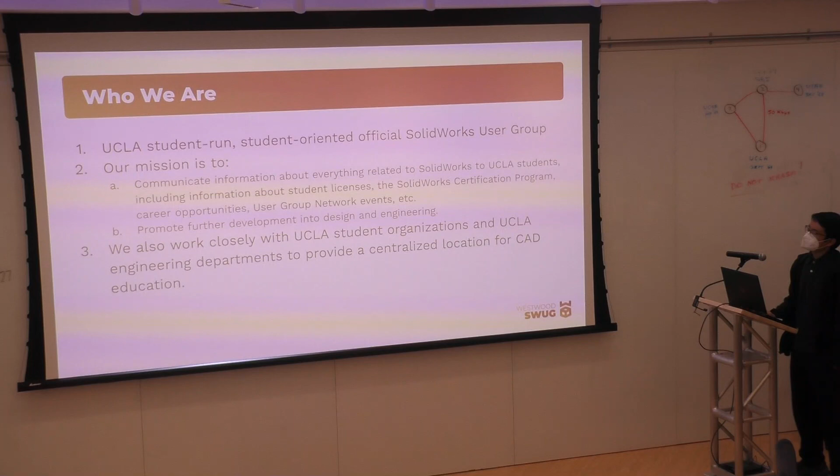Okay. So first, who we are. We're a UCLA student-run, student-oriented, official SOLIDWORKS user group. A user group is one of many user groups across the world that benefit from SOLIDWORKS official branding, but also official resources. As a user group, we're qualified to give out certifications, certification vouchers, official resources for preparing for those certification exams, and also to connect you with official SOLIDWORKS events.

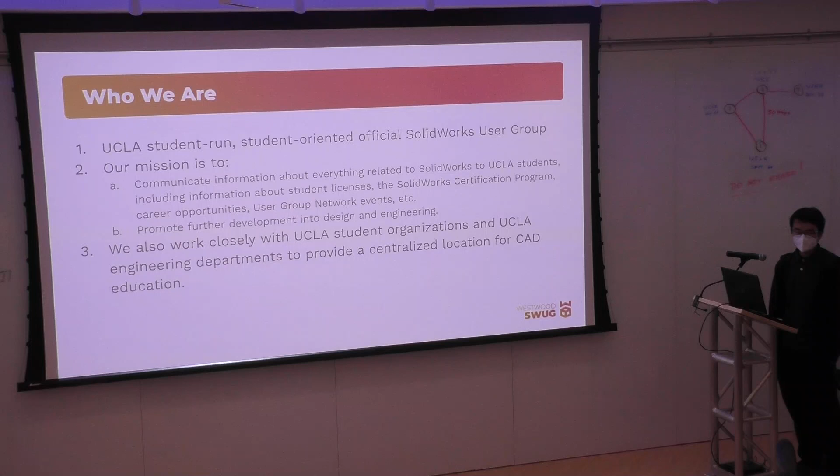To this end, our mission is twofold: firstly to communicate information about everything related to SOLIDWORKS to you, and also to promote further development into design and engineering in general. We also work closely with UCLA student organizations. I believe all of you heard through a UCLA student organization and not directly through us. And also with UCLA engineering departments; we sometimes work with the MAE department for department-wide emails for advertising as well.

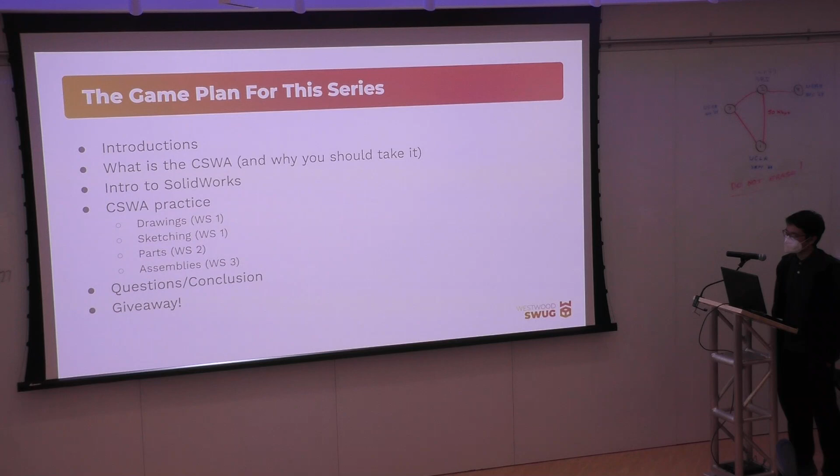So what is the CSWA exam? CSWA stands for Certified SOLIDWORKS Associate. This is the first exam out of 3; actually there are a few more levels, but there's associate, professional, and expert, in increasing order of difficulty. It's a 3-hour exam, and a 70% passing score is needed, so it's a C. It's not too hard. It can be finished in under 2 hours if you have enough experience, so plenty of time for you to finish.

There's no live proctor, so theoretically nothing prevents you from cheating, but don't do that. It is strongly recommended to work on your local machine, because if you lose internet connection and lose all your work, you have to start from 0, and we don't want that to happen.

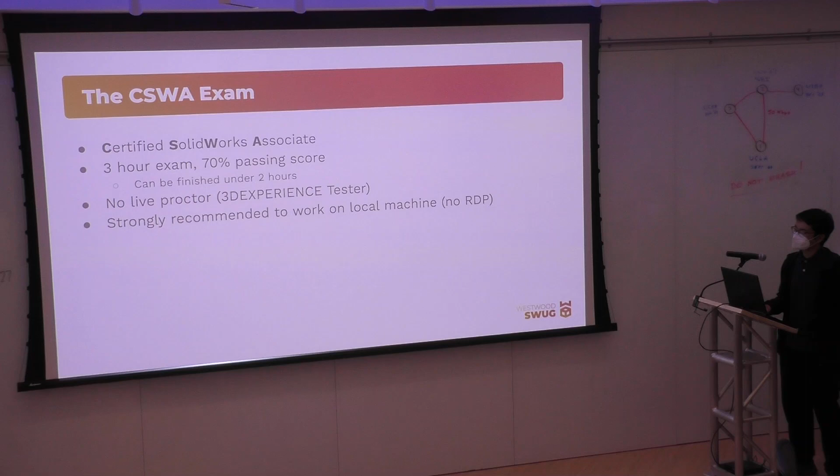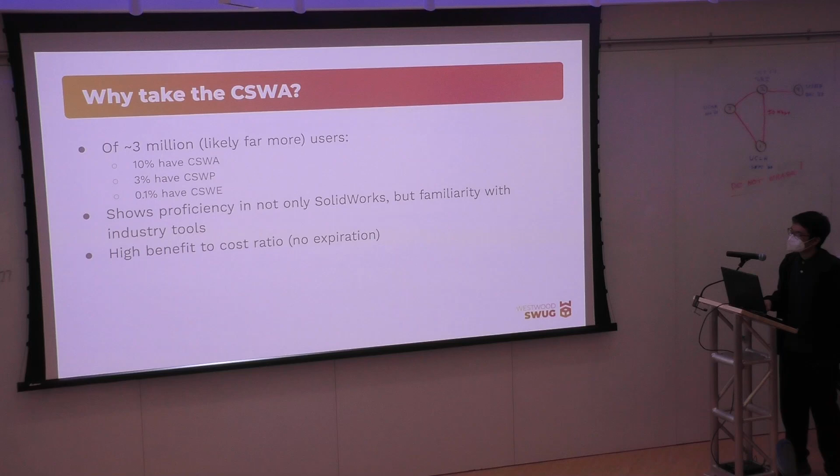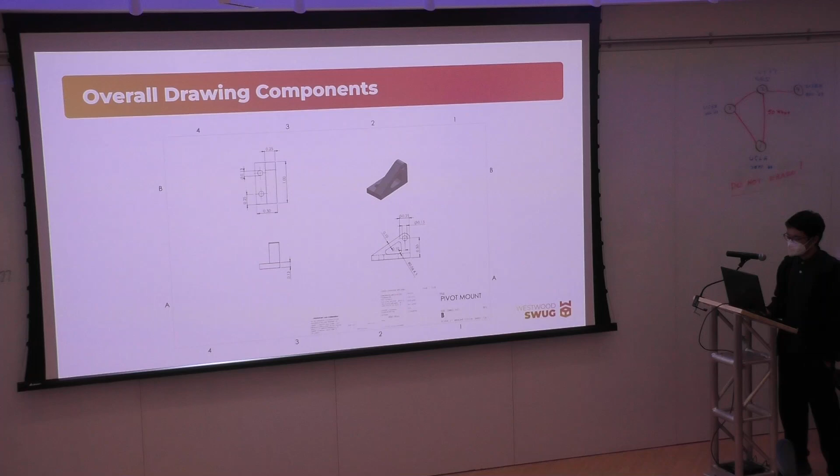Awesome. So now we have a little cheat sheet that has drawing views. And how many of you guys didn't get the email that this is talking about? But for the rest of you, it should look like this. Does everyone have theirs?

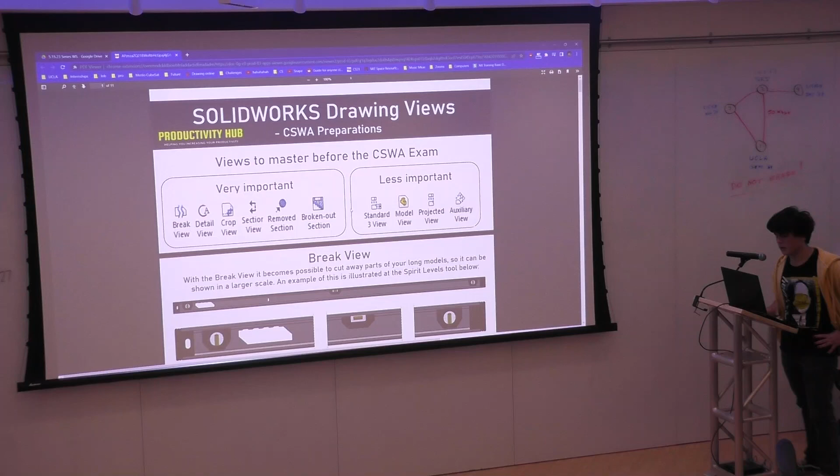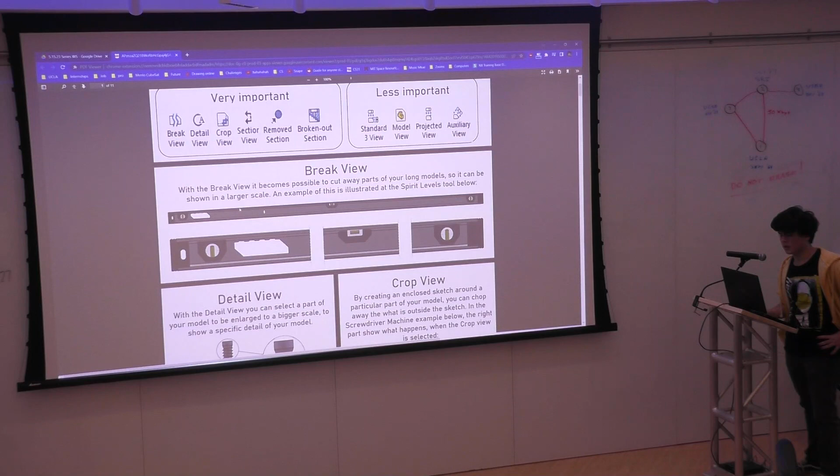Awesome. But this just goes over 6 views that are very likely to be on the exam, and then 4 that may or may not be on the exam, depending on the difficulty of the CSWA. But the first one that you're going to want to definitely know is a break view, which is pretty self-explanatory. It's just a broken section, kind of in the middle, if there's nothing really interesting going on there.

A detail view could just be like a little circle that's magnified. That's also a little self-explanatory. And then the crop view is sort of similar to the detail view. The detail says a specific scale, but the crop view can be anything. They're pretty similar. Oh. Do you have a question?

Oh, the PDF. Oh, wait, how many didn't get it? There were 3? Oh, 4, oh.

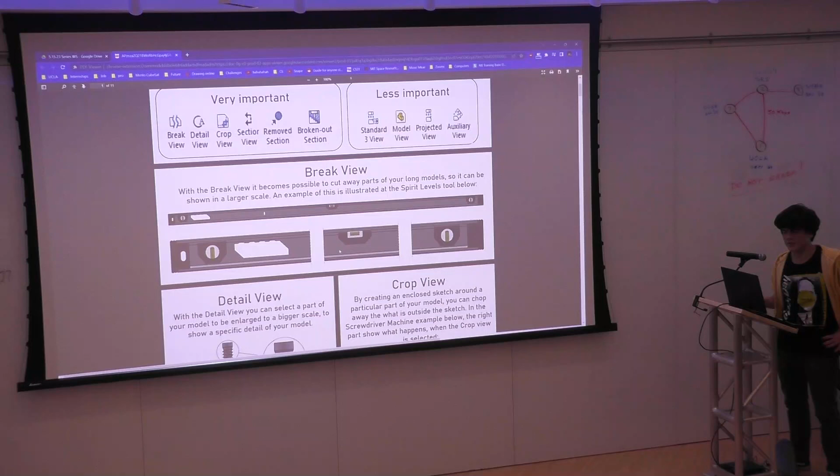Interesting. Does everyone understand these 3 views though, generally? But yeah, you'll have this PDF to reference, and even when you're taking the CSWA, you could reference this document because technically there is nothing to really stop you.

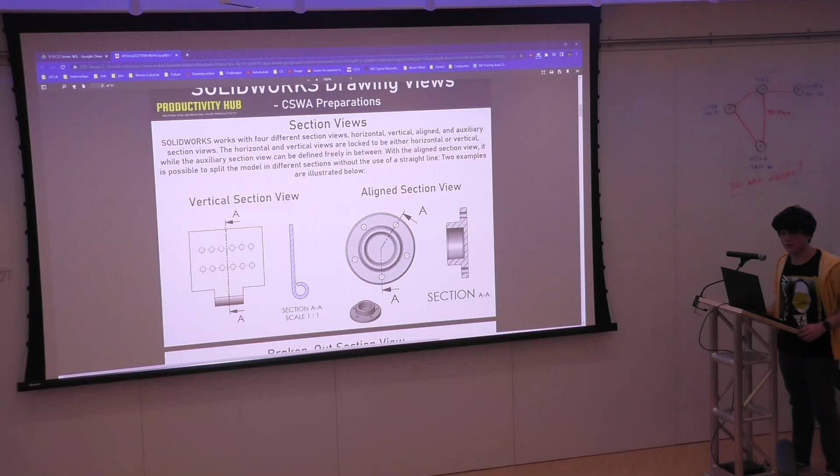And then two also important ones that might be on multiple choice, because basically the way the CSWA is structured is there's going to be 3 sections. The first section is going to be small questions, including what's the name of the view that will give you this image. And then parts 2 and 3 are parts and assemblies, which we're going to touch on the second and third days. But this first day is going to be about the views, to kind of internalize those. Does that make sense, everyone?

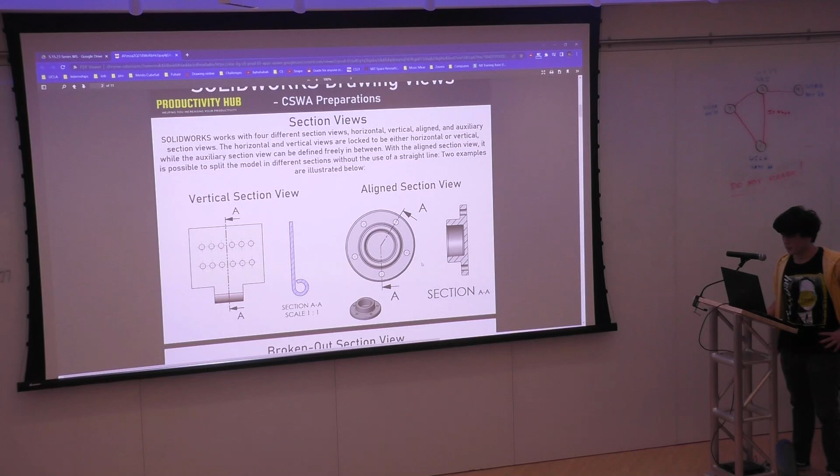But yeah, a section view is when you have 2 letters typically, and it will tell you which section it is. And it's basically, if you take a plane and slice it down the middle, right where that line is, when you look at that plane, that's what's going to give you this little image right here. And then an aligned section view is similar to the section view, it's just not a straight plane, it could be aligned in a different way. Does that make sense to everyone? But both of them will say section AA, or something like JJ, DD.

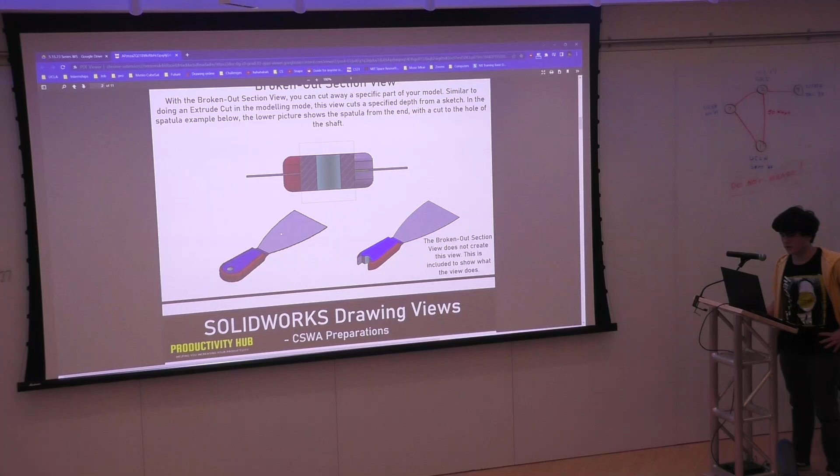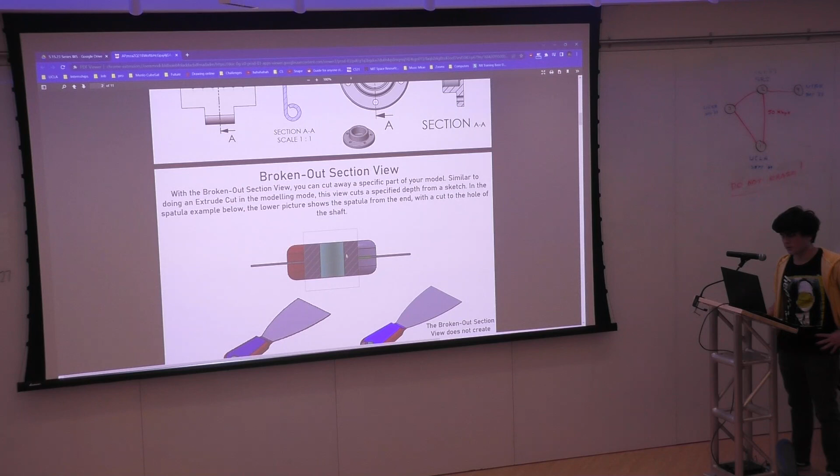And then a broken out section view is when instead of forming the entire plane through the entire object, it's just a little small broken out part of that. And that's just the terminology that I guess we use to do this. Does that make sense, everyone?

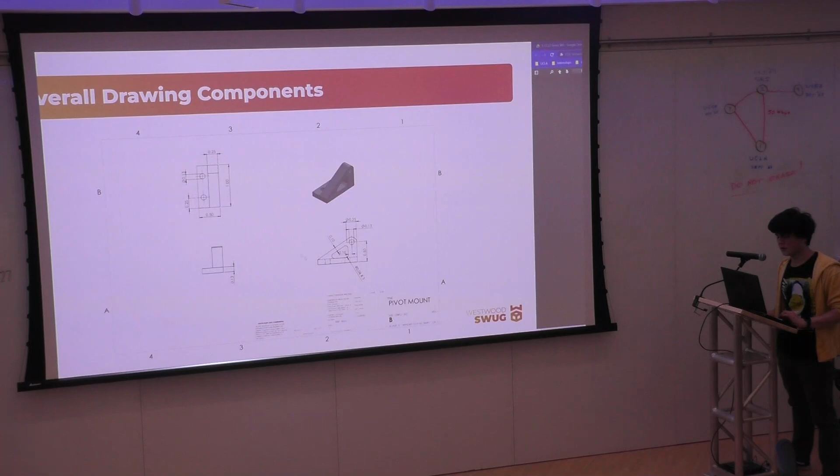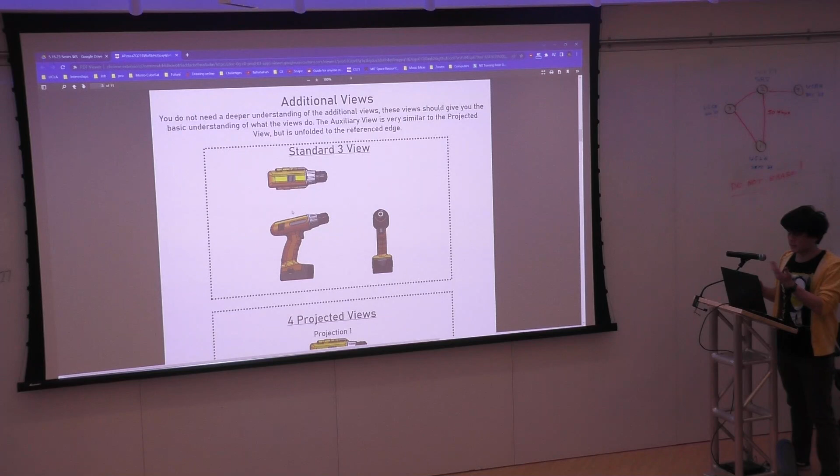Cool. And then here, you don't really need to know this for the CSWA, it won't ask questions on these types of views, but when you see the part on, for example, this drawing, there's 3 projected views. That together is called the standard 3 view. So if maybe your professor asked, hey, can I have a standard 3 view of something, I've never taken the CAD class, so I don't know if he's going to ask that, but that's what we refer to as a standard 3 view. And then 4 projected views is the similar thing, but for top, bottom, left, and right. Cool.

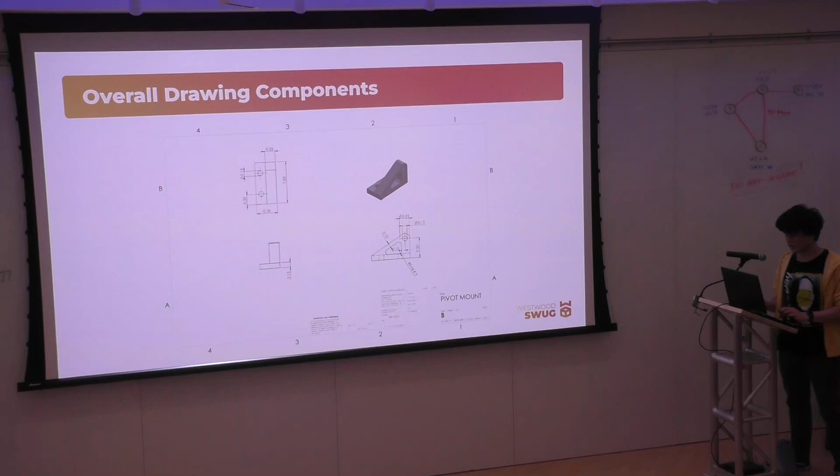Any questions on just the drawing views? And you can take time to internalize this. You have the PDF as well, if you ever need to reference it when you're taking a practice exam or just looking over the questions. Sounds good? Cool. So, for example, here's an example question. Would anyone like to volunteer to answer this? Feel free to reference your PDF as well.

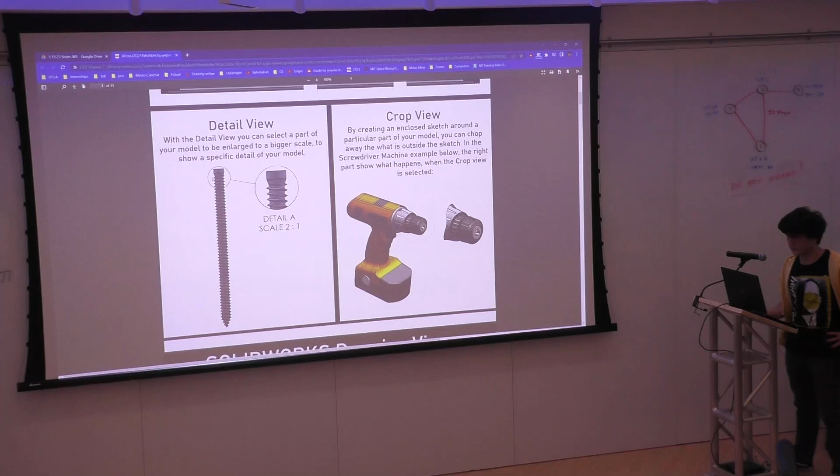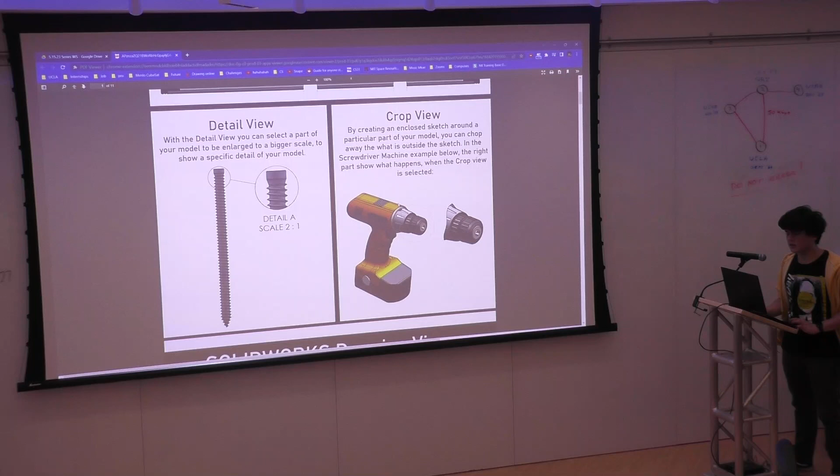Yes, crop view, because the way you make a crop view, let's go back to this document for a second. I'm pretty sure a detail view is always a circle, but a crop view, the way you make it is you actually create a separate feature, a sketch, and then make a little line, and whatever's inside that line is what you can view in that crop view. And so the way you can distinguish these two is if it's not a straight box or a circle, then it'll just be a crop view.

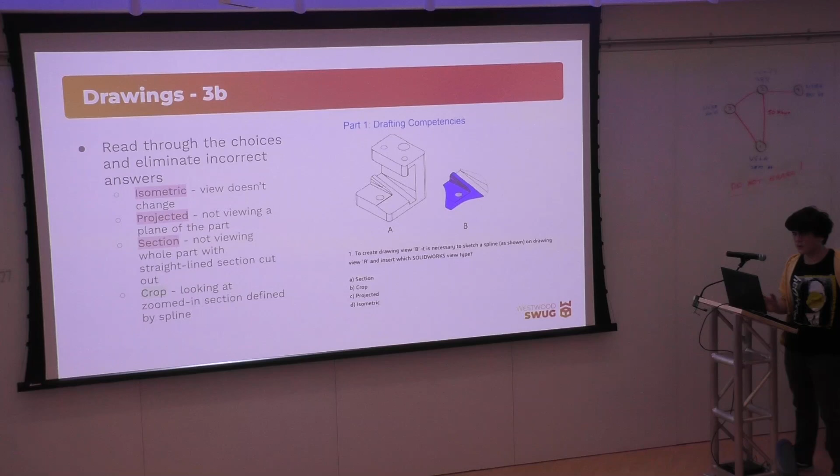So you can also do this by process of elimination, because the isometric view was when you could view all 3 sides, and B is not an isometric view because you can't see the entire part. And then a projected view is you're not viewing it straight on. And then for the section view, there wasn't a dashed line that said AA or something like that. So that's how you rule out the section view. Section views are pretty easy to identify because they say section AA or something. A is an isometric view, yes.

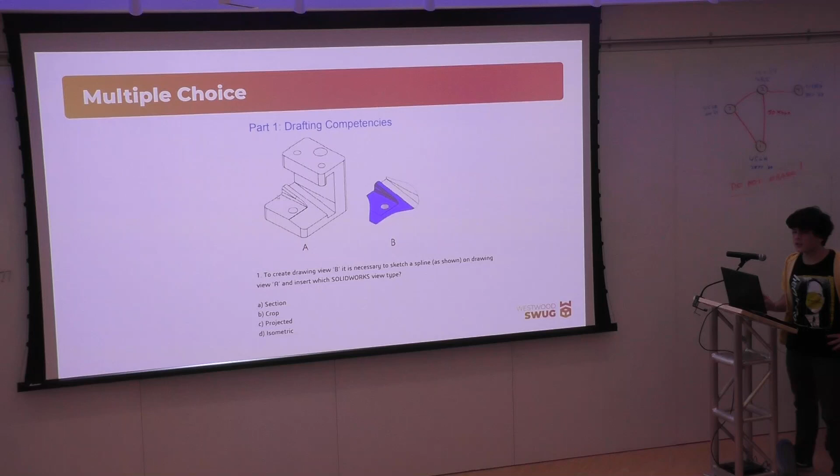And then what about this one? Okay, so right up here, it actually shows there's a little bit of a spline sketch that kind of outlines the same thing here, but it's just a dashed line.

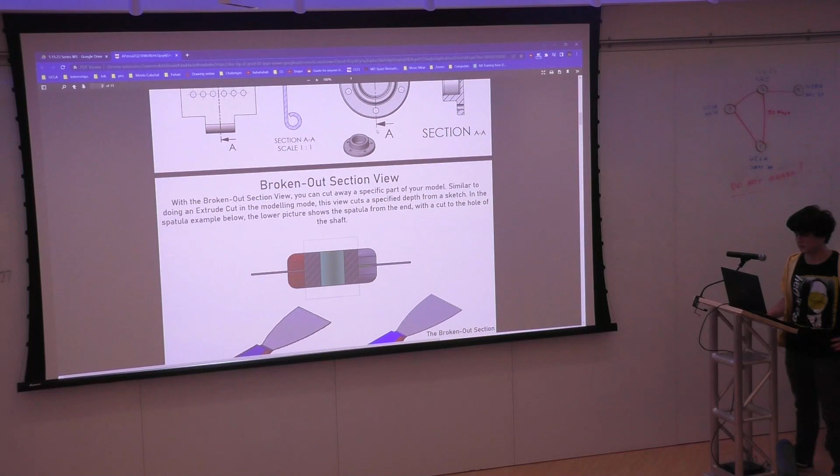Close, because it does take a small section out of the object, but it's a specific one. Here, to go back to the document a little bit. It's one of these 3. So here's the slides again. So yeah, which creates this view from this?

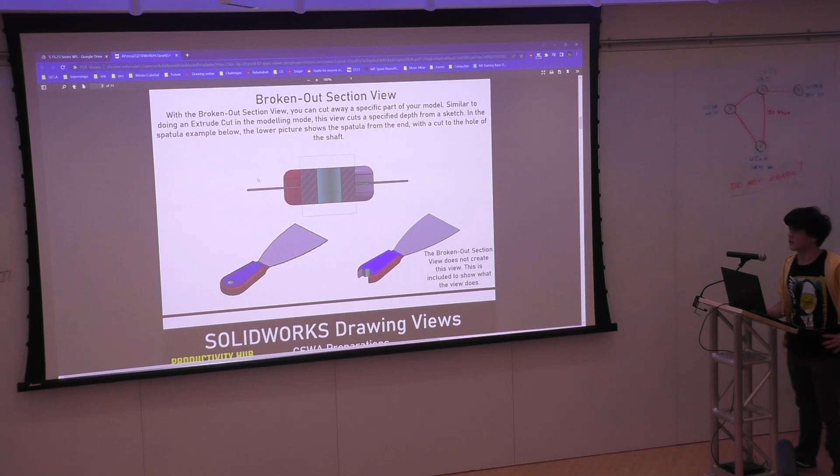Yes, correct. I don't know if we have an answer slide for this, but it is the broken out section, because as you can see, this is a very helpful graphic Suraj found, and it's basically like if you just take a part of it and break it out, so that when you look at it, it's like you're looking kind of at an X-ray view, and that's what it looks like here. So, that was technically another little show.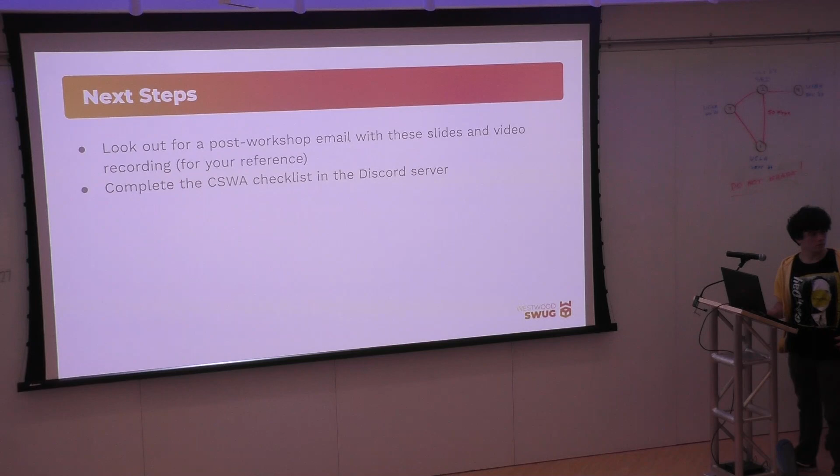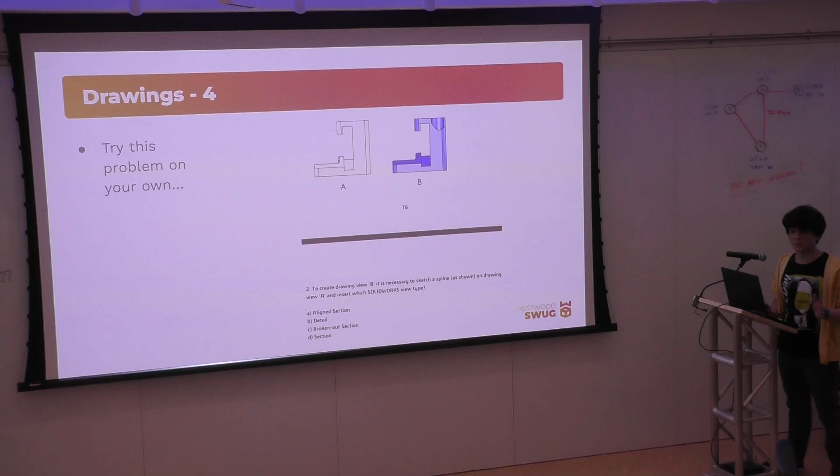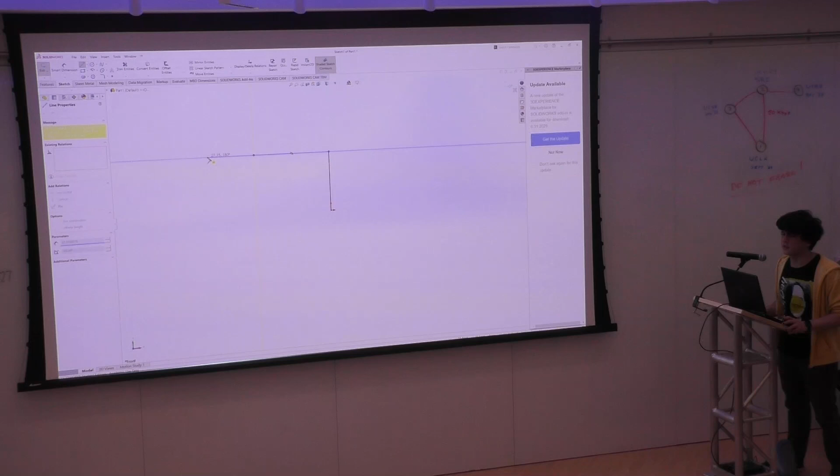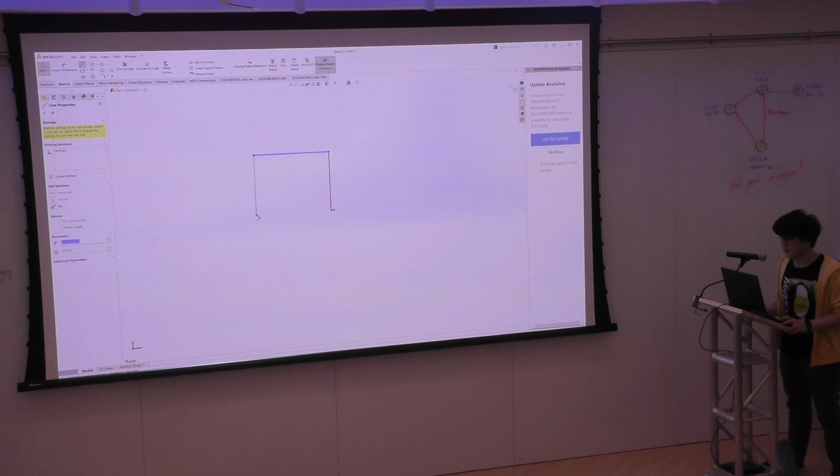And one thing that SolidWorks will do is it will sort of snap it to whatever it thinks you might want to do. So for example, this right here is a vertical line. This will snap to horizontal, and it will give a little blue thing like, yay, I'm helping you out. And it will also interpret other things, such as this being horizontally aligned to the origin. But you will need to do other things in order to make sure that it doesn't move, because I can still move it. Everyone following along so far?

Ooh, I did the cardinal sin of not setting my units before I sketched. So eventually you need to set your units. If you go down to the bottom right, you can't really see it on here, but it's going to say custom. And depending on what the part says, you're going to want to go IPS, so inch, pound, seconds, imperial, or MMGS, millimeter, gram, seconds. These are going to be the two that were on the CSWA. I'm just going to click millimeters because we're not savages.

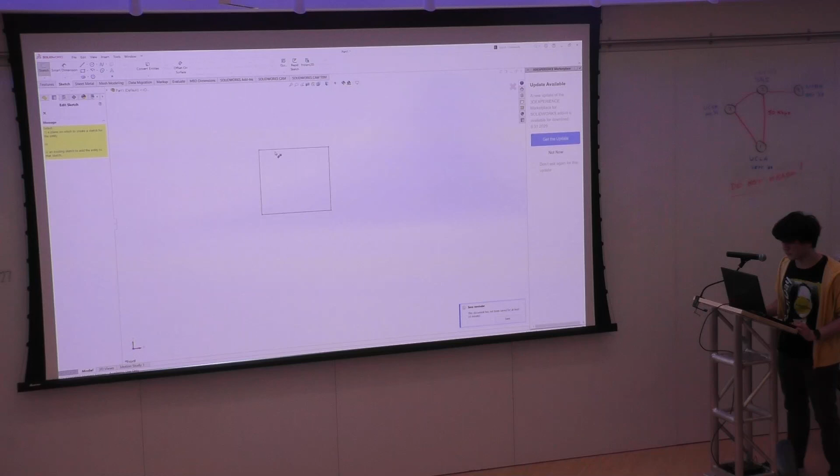So basically, the way that CAD software creates your part is, in order to actually make your part, your part that's unique, and not this rectangle versus this rectangle, you're going to need to specify how long it is and specify the dimensions. That's what's called defining our sketches.

So, for example, I'm going to make this line 50 millimeters long. And now I can't move this because it's fully defined, because right at the bottom right here, I started this entire thing at the origin. So it's locked to where the origin is 0, 0, 0. And this is 50 millimeters to the left, and it won't be able to change. Any questions?

Nice. And if you have a mouse, you can also hold down the right click, and it's going to give you kind of a wheel, and you can go up and down in order to access these things. And then I'm just going to dimension this to like 40 or so.

And now at the very bottom right here, it's kind of hard to see. I wish the projector was a little bit better. But it should say fully defined, and all of your lines or curves or whatever you're making on your sketch should be black. Does that make sense to everyone? Anyone having trouble getting it to say fully defined down here?

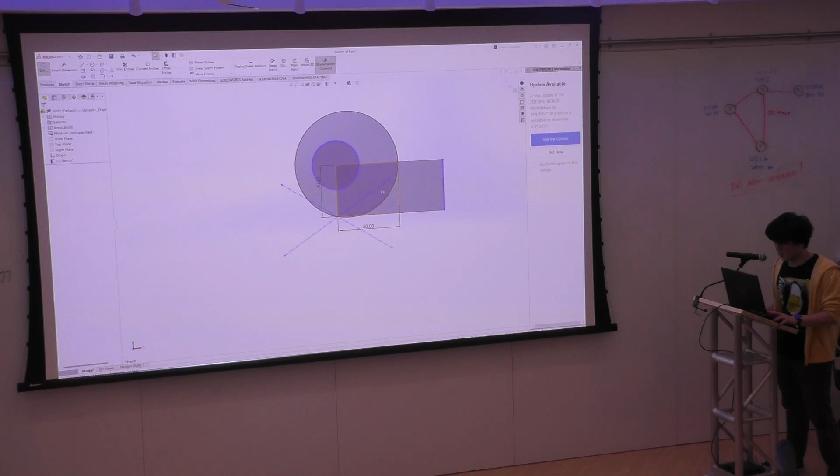So one thing that I have not gone over yet is in the lines specifically, there are these things called center lines, which are also called construction lines or construction geometry. Here, let me make an example. This is me jumping ahead a little bit, but I'm going to create a construction line shaped like right here. All 3 of these are going to be construction.

And what you're going to see is that there's no solid color in here because it's construction. It's only for constructing the sketch. You can't actually do anything with it. So I'm jumping ahead, but if I was to make this into a 3D object, I can select the circle, I can select the rectangle, but I can't select the construction geometry.

So when you actually go to make a 3D, SolidWorks is not going to register the construction geometry as anything, because it's just a useful tool to have when you're trying to make sketches. Any questions so far?

Awesome. Is the pacing good? Should I go a little faster, a little slower? Yeah. Like which of the circles, or?

No, because the solid lines, the solid black or blue lines, are all just normal geometry. And then this dashed line right here, you can see when I hover over it, it's dashed. Oh yeah, you can see a lot better here. And then right here, let me align it better, there. These are construction geometry. And if I constrain it, it might be,

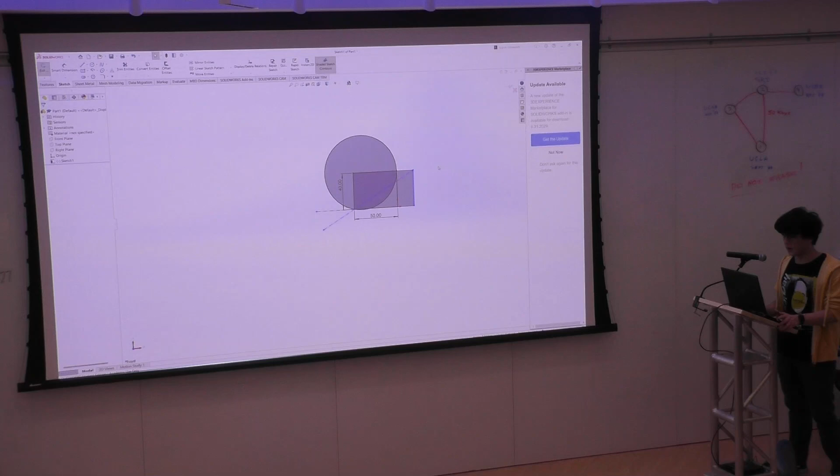So defining just means that there are 0 degrees of freedom. So for example, this, because it's a 2D sketch, it has 2 degrees of freedom. It's already constrained only to be along this line right here. Because if you click this point and hover over it, I think I accidentally disabled my relation showing, which is unfortunate.

But if you try to drag this around, for example, it will drag around. That's because 1 degree of freedom is constrained by this line, but the other degree of freedom isn't. So if it's showing up blue, that's because you can still move it. Anything that's blue, you can drag around and see which degree of freedom you need to constrain.

So the way I'm going to do this is, because it needs to be along here, I'm going to quickly make this 35 or something. And now it has to be 35 millimeters away from this, and I can't move it anymore. Does that make sense? How do I get that to show the eye on the top? What are the dimensions? Wait. Here? Ah, okay. Thank you.

I didn't know that. But anyways, for example, this one right here is showing that this circle is tangent to this. This is showing that it's horizontal, which is just a straight line to the left and right. These are vertical ones. This is coincident, so this vertex that sits right here is coincident to the origin, meaning it sits directly on top of it. Yeah, any questions?

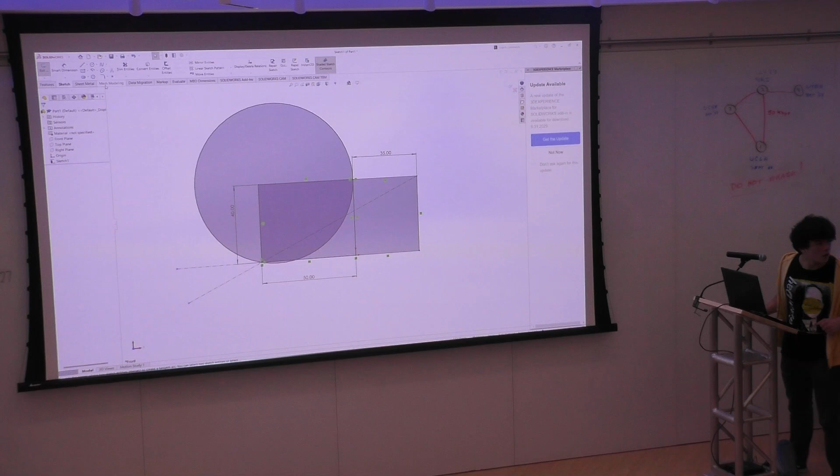Do you want to do some of these? Yeah. So just really quickly, I think we kind of skipped over this, but that's fine. So if we exit out of Sketch, and say you want to view a different angle of your part, middle mouse, and then drag. And so this little, almost full revolution arrow thing appears, and you can rotate.

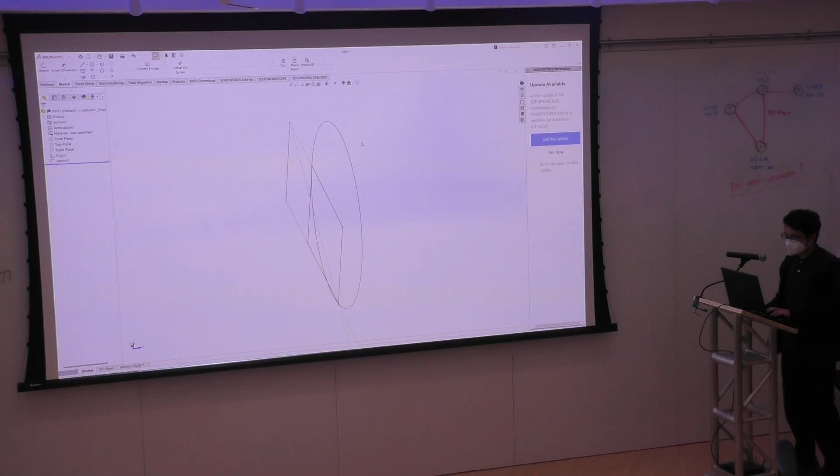And then say you rotate to some random thing and you want it back in its somewhat viewable state, then you press the space bar. Once you press the space bar, everything zooms out, and you get this little dialogue right here. It says orientation. On here you have a bunch of different buttons: top, left, right, front. But usually you'll just click on isometric, which brings it right back to isometric.

So again, space bar, and this little box, that's isometric. It's usually a lot faster to just do Control 7, so that's a shortcut. So say I perturb it, Control 7 brings it back. Say also that you had zoomed in way too far into your part or zoomed way too far out, then you just press F and it brings everything back into a nice, centered view.

So again, that's F. And one last thing, if you want to pan, pan means just moving your view left and right with no change in orientation. You do Control, middle mouse, and you can just move everything. This is useful if you want to zoom into something that's not aligned with the origin or the center of your part. So say I want to zoom into this little dot right here. I just zoom into it. Okay. And F again to restore.

In terms of general UI components, on the left you have what is called the feature manager. This contains all of your features. Colin created one sketch before, so you can see it's named sketch 1 here. A part comes predefined with certain features already: the front plane, the top plane, the right plane, and the origin. The origin is just the intersection of these 3 planes. And at the very bottom of all these features is what's called your rollback bar.

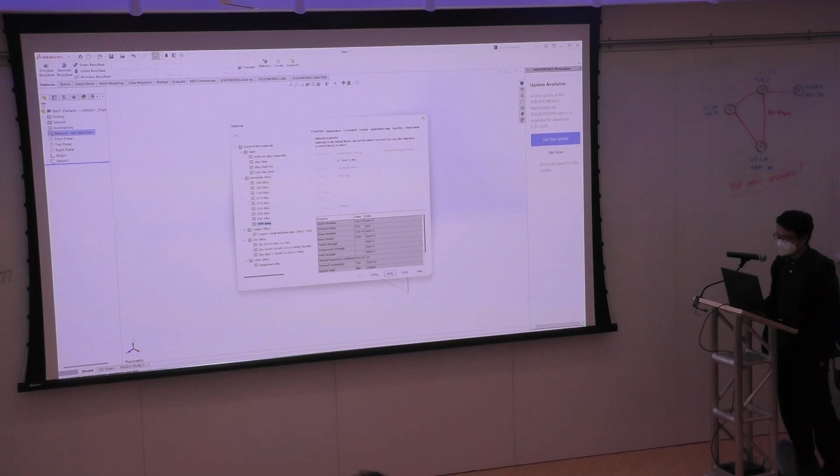So it says 2,700 kilograms per cubic meter. So you can just check if it's the correct material or not. And then you just click apply, and you close. So right now, on the left, it says 7079 alloy. So this is the global material for the part, and this is good practice to define along with your unit system before you start doing anything else.

Anybody have any questions before we move on to actually making a part? Still have 20 minutes. Good time. No question? Okay, sick. Awesome.

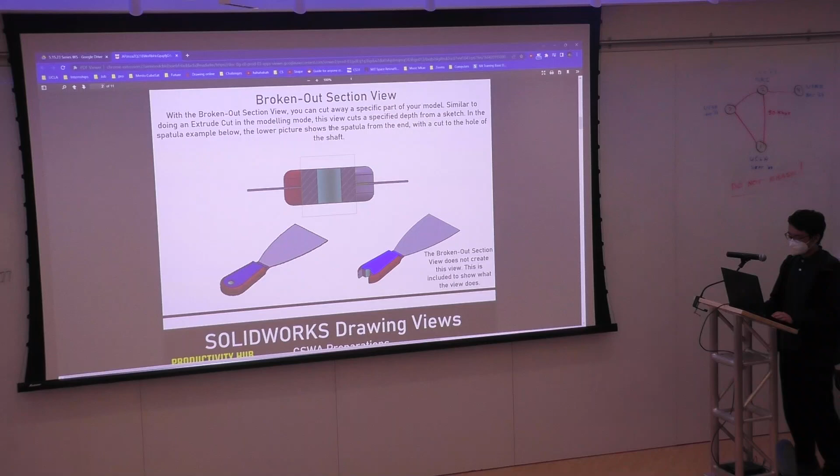Okay. So let's go ahead and open up the PDF again. And this time we scroll down. This is our first part we're going to be doing today. Oh, sorry. Colin's scroll is reversed. Sorry. Okay, no problem. So this is the first drawing that we're going to be doing today.

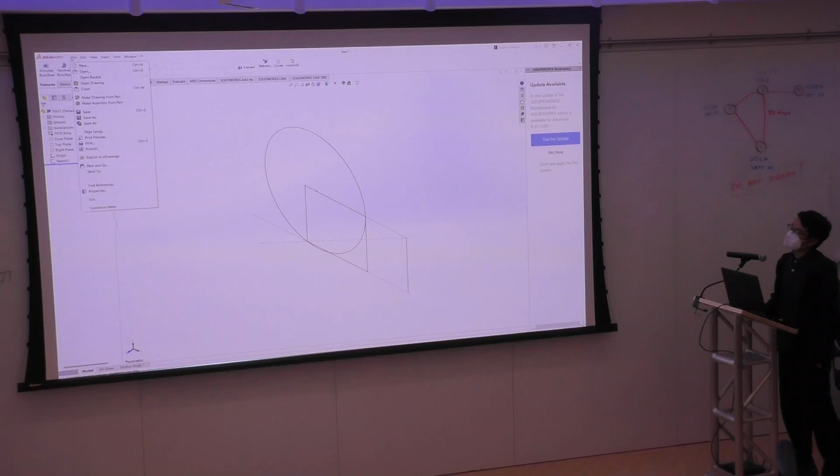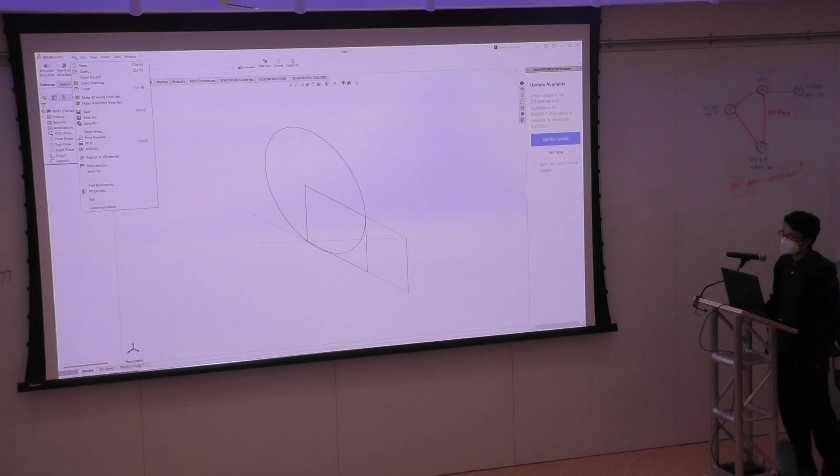So before we do anything, we can go back to SOLIDWORKS and create a new part. So that's right up here in the top left, there's this little arrow. It's usually hidden behind this arrow. If it's not hidden, then good for you, because I spent so long trying to look for this menu. You just need to hover over that little right-hand arrow until you get File, New, and then you can create a new part. Click OK, then it creates a new part. And on the left, you have all your normal features, your front plane, your different planes, your origin.

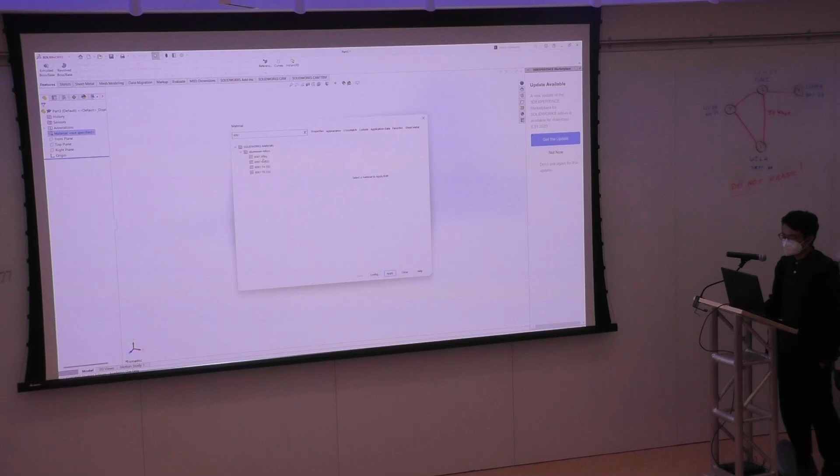So we want to first define our unit system. So on the bottom right-hand corner, we don't want custom, we want IPS. So we click IPS, and then we define our material. So we want 6061 alloy, which is not in the favorites list. So you right-click, edit material, you search for 6061, and you get 6061 alloy. And then we click apply, and then click close. So this is the initial setup done. Very fast, but very important to do.

Does everybody have material and the unit system set up? Does anybody not have this set up?

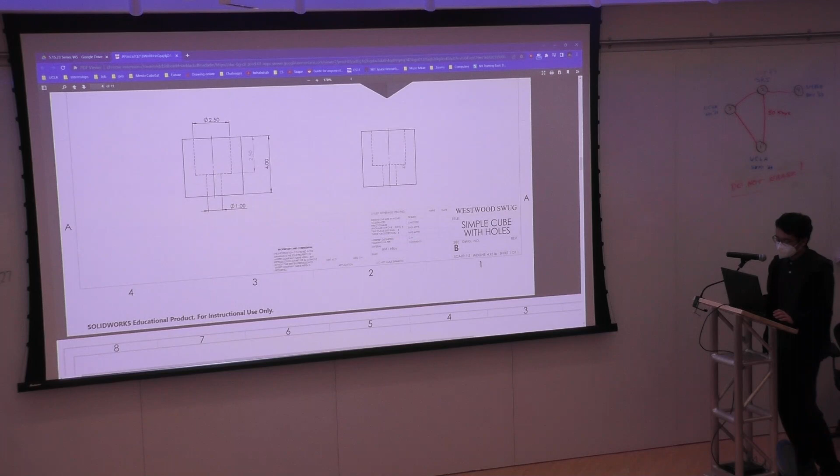Okay, I'm going to assume that's okay. We're fine.

Okay. So next, what we want to do is actually look at the views themselves. So as I said before, we have our isometric view on the top right, and from what it looks like, it's a pretty simple part, right? It's literally a cube that has two holes cut into it of different sizes, and both not entirely through the entire cube, right? And we know it's a cube because if you look at the top view, you can see 4 inches length, 4 inches width, and then 4 inches for the height on the front view.

So the reason why this height dimension isn't in the top view is, of course, because this edge in the front view just looks like a dot or a single vertex in the top view. So we need to have another view in order to show that dimension. So we know it's a cube, and we also know that it has 2 holes, because if you look at the front view here, you can see the hidden lines again, because these are dotted lines that show whatever is inside the part.

And we see that we have a diameter of 2.5 inches, and this is drilled down, I guess you could say, a depth of 2.5 inches, and then underneath it we have another hole of 1 inch diameter. And you can see that both of these are centered, so they're not offset across the center of the cube because it has the center line going down.

So sorry, I didn't cover this before, but a center line can be distinguished in a drawing when it has a long, short, long. Whereas a hidden line, you'll only see dot, dot, dot, dot, dot. So there won't be any variation in the length of the lines for hidden lines, but you will see long, short, long. And once you see a long, short, long, that means that it's symmetric about that line. So I know that these holes are centered in the middle of the cube because there's a center line there. Any questions?

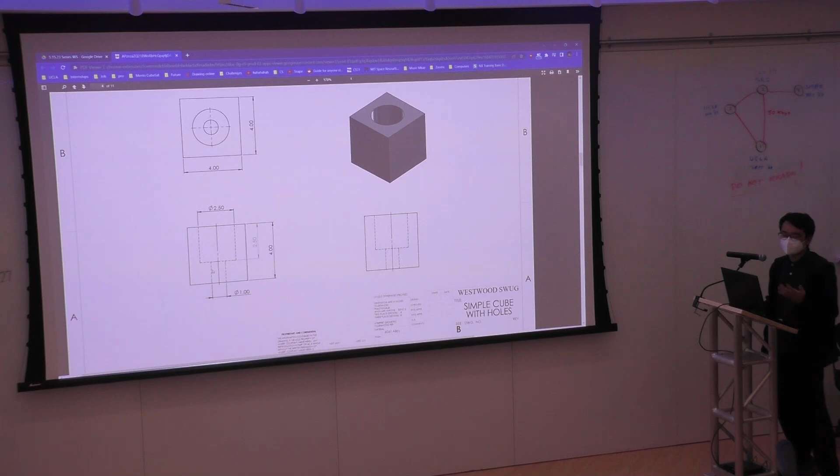No? Okay, good. So can anyone tell me what they would think is the correct order? I mean, there's a lot of correct orders, but what's the way that you would go about modeling this part? What's the order of, I guess, sketches, features that you would create? Okay, nice, nice. What would you do after that? Mm-hmm. Okay, nice. Did everyone catch what he said? Yeah? Okay, good. Yes, that's actually how I would make it.

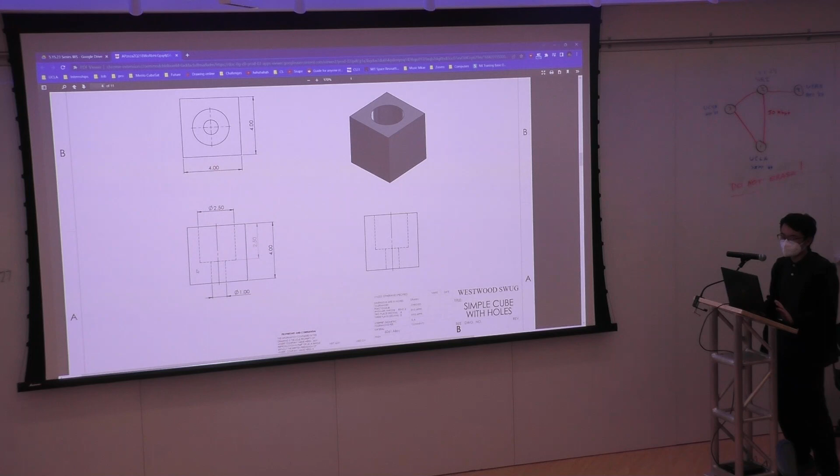But for the purposes of this workshop, we're going to put all the sketches into one sketch. We're going to combine them all into one sketch and then extrude from that one sketch. In the actual CSWA, this is not necessarily encouraged because if you combine all your sketches into one big fat sketch and then you make a mistake, then you might have a lot of work to go through. But since we're just covering sketches today and covering features in tomorrow's workshop, we're just going to put it all into one sketch. So let's go ahead and actually create that big sketch.

So can anyone tell me actually which plane we should make that sketch on? If we were to make only just one sketch, or combine all sketches into one sketch, which plane would we put it on? Not necessarily, because if you put it on the front plane, right, you can only extrude it forward and back of the front plane, then you wouldn't be able to create a circle, right? Top, yeah, top is correct, because on the top plane you can see all of the relevant features in a 2D form. So that means that you can create all of the features from the top plane.

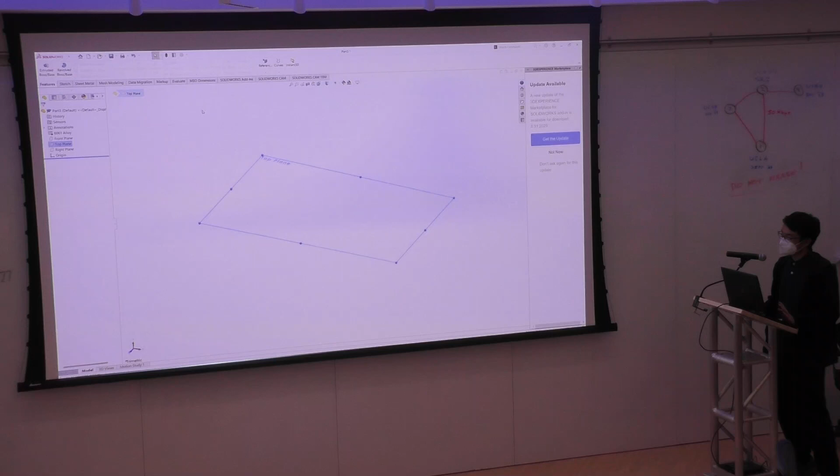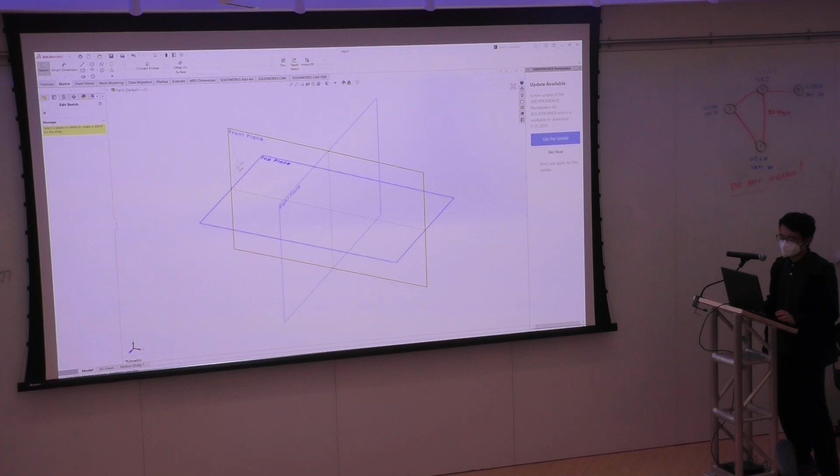So let's go ahead and go back to SolidWorks, and on the top plane, we want to make a sketch, right? So there's two ways of creating a sketch from a plane. You can either right-click on it, and then right here, there's this little sketch button, or as Colin did, you can also click on sketch, and then click on the top plane. Either way is fine, same end result.

If it happens that you do not get a properly oriented sketch view, so for example, if it's slightly offset like this, or some random orientation, what you can do is right-click on this sketch, and then click on this little normal to, and it'll automatically reorient it normal to your view. So this is important because if you make a circle and it looks like an oval when it's supposed to look like a circle, then you know that you need to make a normal to.

So once you have this, then the very first feature that we can make, we can start from the inside and go outside. So we can start with this little circle first in the middle. We know that this has a diameter of 1 inch because if you look down on the front view, you can see it has a diameter of 1 inch, right? So we can use a center circle. Again, that's right here in the top left. You hover over it, it says circle, and you click on circle.

You first select the center, and then you select the circumference. So that's 2 clicks. And once you create 2 clicks, you can press escape to deselect. Then you get a blue circle. And so remember, Colin said blue means underdefined or not fully defined. That's reflected down here, it says underdefined. It's also reflected in the left on the feature manager, where you see this little minus in parentheses. That also means underdefined. Once it's fully defined, you won't have a minus anymore.

So in order to fully define it, we need to add a dimension. So we click on Smart Dimension, and we click on the circumference of the circle, and then we give it a value of 1. Press Enter, and then right now it says diameter of 1. That's pretty simple. Everybody good with the circle?

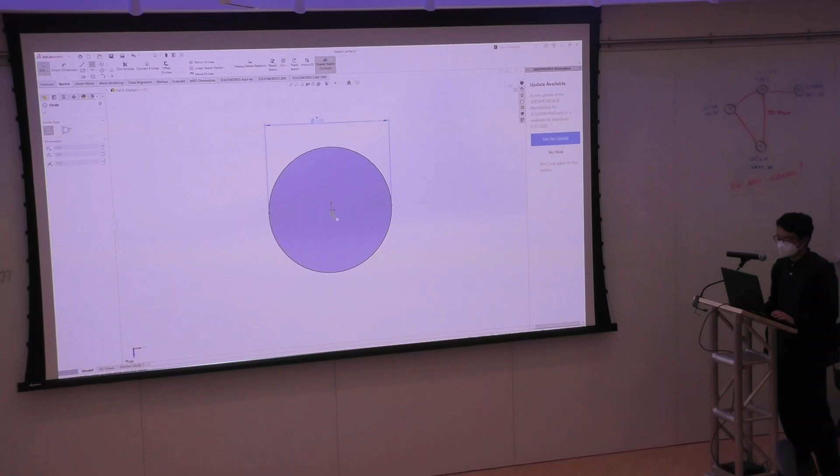Okay, nice. So next is the next biggest circle. Again, repeat the same process, 2.5. So you select the center, you select out. We know it's bigger, so you put it out. We do Smart Dimension, 2.5. Press enter, everything's black again, fully defined.

And the last one we want to do is just make the square, right? So we know it's width of 4, length of 4. So we can use the center rectangle for this. Click on center rectangle, click the center, go out, and then we need to add 2 dimensions, one for the length and one for the width. So we add 1 for the width, 4, add 1 for the length, 4, and now everything is black, and we have fully defined.

So this is actually the end of the sketching procedure for this part. It's a pretty simple part. Does anybody have any questions before we actually move on to the next part? Yeah. Okay, I'll give like 30 seconds before we move on to the next one.

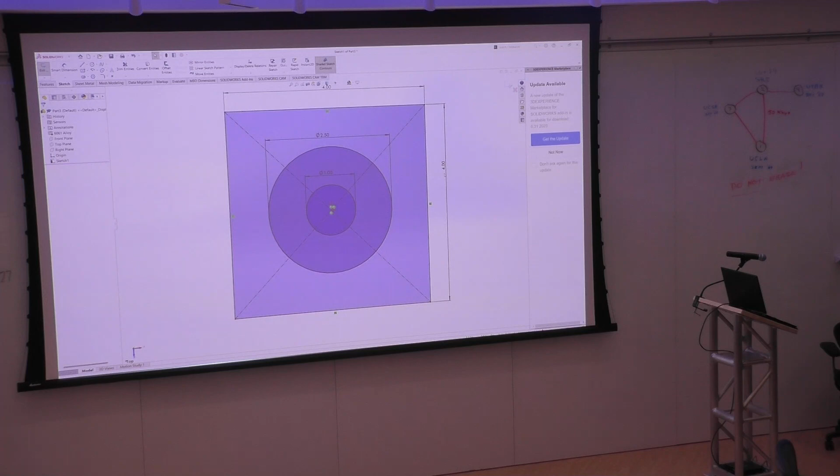Let's move on to our next part. This one's slightly more complicated, but I'm sure you guys can get through it. So we'll just go ahead and scroll on to the next drawing. So this is the latch. This, as you can see, looks slightly different than the cube drawing, because in the top right, our isometric view is no longer shaded. So it kind of just looks white, no color. But again, it's still isometric view.

Nathan, who is another workshop leader, actually said units IPS here, which is nice, removes ambiguity. But you could have also inferred that by the weight down here, which is 0.059 pounds. So here we're actually missing a couple of views, right? Can anyone tell me which of the standard views we're missing? Top? Yes, that's correct. We're missing the top view. We can see the front view here, we can see the right view here, but there's no top view.

And there might be a couple of reasons for why you want to omit a view. One, in this case, maybe you just ran out of room, so you didn't include the top view. Maybe the top view doesn't have any relevant dimensions, so you just remove it for brevity. But either way, we should be able to completely model this without the top view. And so again, this is a single sketch part. In this case, we do want to make the sketch on the right plane because we see in the right view the most features or the most complicated sketch.

So we'll go ahead and create a new part, file, new, part. Right click on right plane, sketch. So we have a sketch on the right plane.

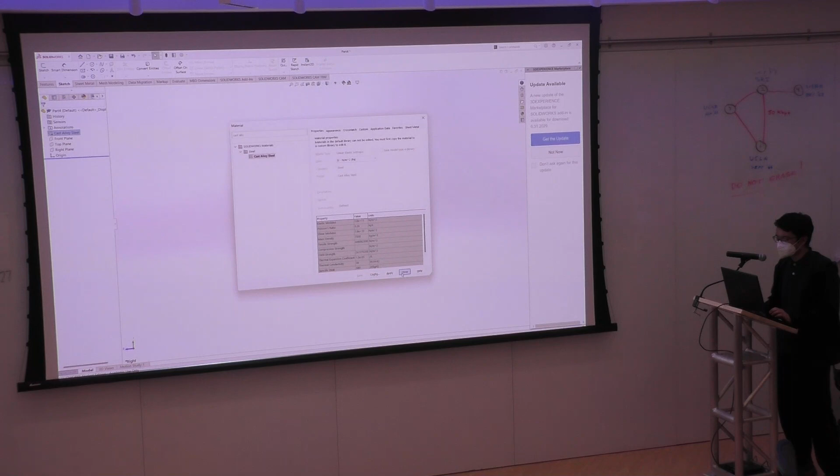So if I wanted to make this circle first, we know it has a diameter of 0.25. Oh, sorry. I forgot to specify my material. Material is cast alloy steel. I also need to change my unit system to IPS. Okay, sorry about that. Okay, right plane again.

We want to create our first circle centered on the origin with the diameter 0.25. So you just dimension it 0.25, enter. And so that takes care of this circle right here.

Next, what we want to do is actually create this bigger circle that you might not be able to immediately see. But if you imagine that this circle was not cut off, and its full circumference was here, then there will be a circle here with a radius of 0.375. So we'll go ahead and create that. And we can infer it's concentric, because it kind of looks that way. There's no actual visual cues for that, but we can just infer that it is concentric.

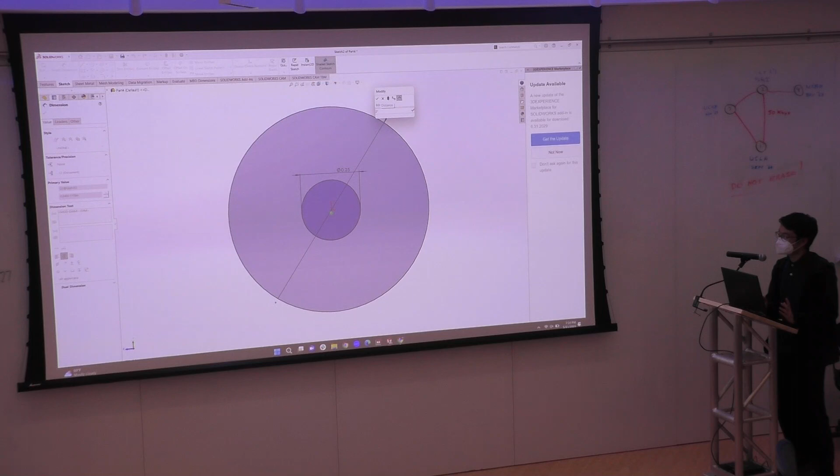So we'll go ahead, go back. And this time, because the dimension defaults to diameter, we can actually do a little bit of math within that window itself. SOLIDWORKS is pretty smart. Diameter is 2 times the radius, so we can just say 2 times, times is an asterisk, 0.375. And so we press enter, SOLIDWORKS automatically resolves that to a number, and then it gives us the diameter.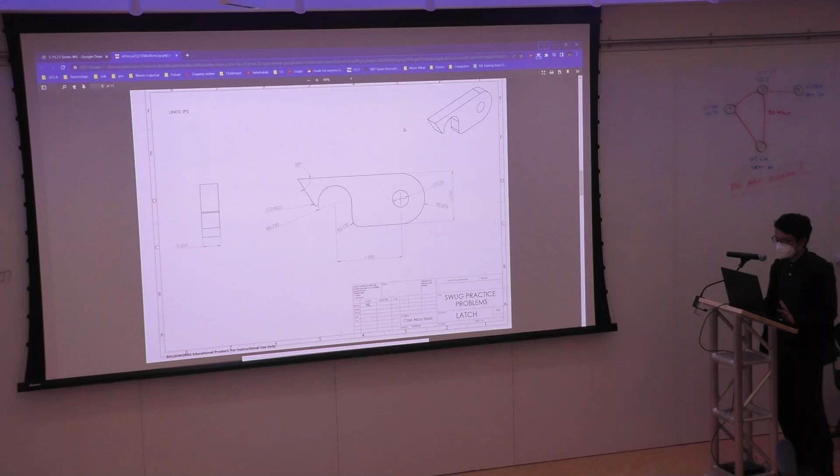Alternatively, you can just create a dimension, change it to radius, and then put in the value of the radius, but either way is fine. So now we have these 2 circles. Next, what we want to do is create these 2 lines that go out from the circumference of this bigger circle. So this is actually quite simple.

We'll just go ahead and select line. You can kind of hover over, and it'll give this little orange diamond that indicates the point that's vertical to the circle's center. So if you click on this, go horizontal out to the side. That's 1 line. And then we'll do the bottom line. So now we have our 2 lines.

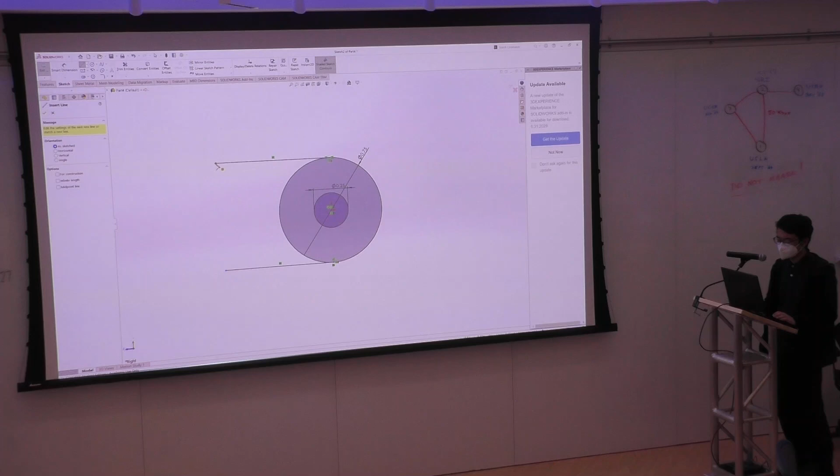Now, the interesting thing is we don't necessarily know how long these lines are, but other dimensions will solve this dimensioning for us. So let's go ahead and create the other stuff. So we have this little line here that goes off to the side, down to the right. Actually, we ran out of space, so we can just drag everything to the left a little.

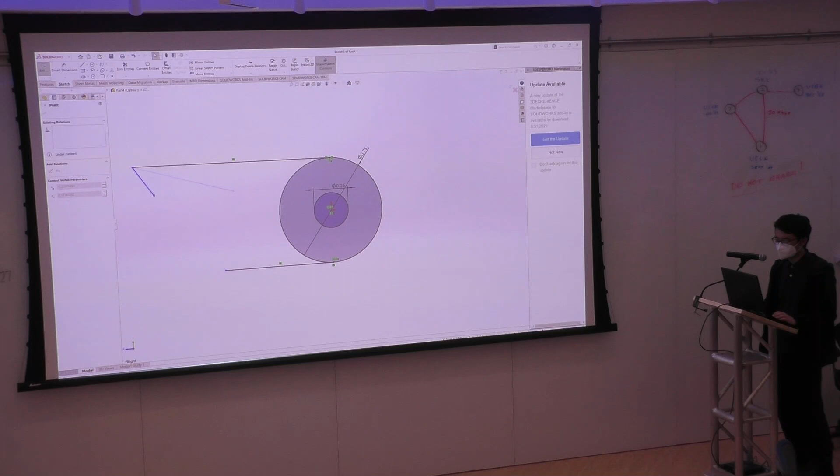Wait, Colin, how am I on time? 7:56. Okay, 4 minutes. Okay.

Then next, what we want to do is create this small little circle here. And for this one, we can be a little creative. We can use an arc instead of a circle, because we know that we're not going to use a full circle anyway. The arcs are right underneath the circle. And we can use a center point arc, because we want to make the center of this arc horizontally related to the origin, right?

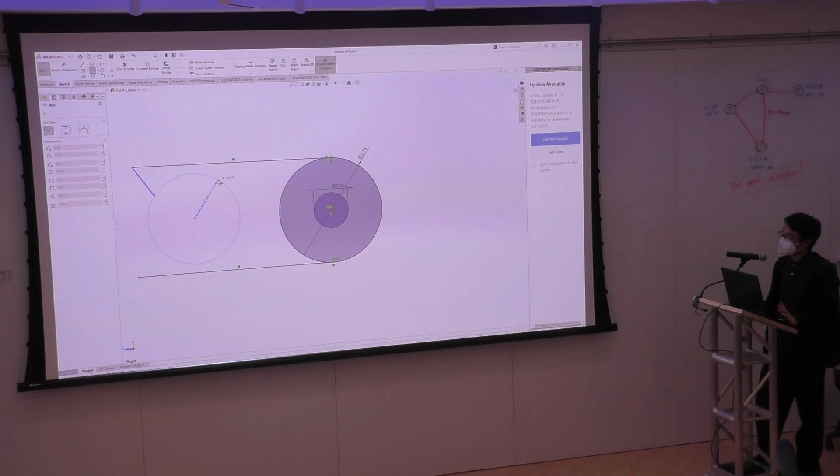So we just go out left of the origin. We see this nice, helpful little dotted line that SOLIDWORKS gives us, saying that we are horizontal to the origin. Left click for the center point, left click for the circumference, and another left click for how much of an arc we want to trace out. So I'm just going to put it right about here. Press escape. So now we have a little arc.

Okay. Now we want the endpoints. Or actually, let me think. Okay, we want this arc to be tangent to this line. So in order to do that, you can just manipulate it a little bit, and we click on the circumference of the arc, and click on the line, and then we get tangent. We click tangent. Okay, that didn't do what I wanted it to do.

Okay, let's try again. And in order to select multiple things at a time, you just press Shift or Control, and you click both. I click tangent. Ooh, it still didn't do what I wanted it to.

Okay. And then we want to make, of course, the end point of this arc... I'll zoom in. The end point of this arc coincident with the end of the line, and so use Control, select these two, do coincident. Okay, so now what we have is this arc is tangent with this line, and it's coincident with the ends. Next, what we can do is, again, the center point of this arc is horizontal with the origin. So we do Control or Shift, select both, click on horizontal.

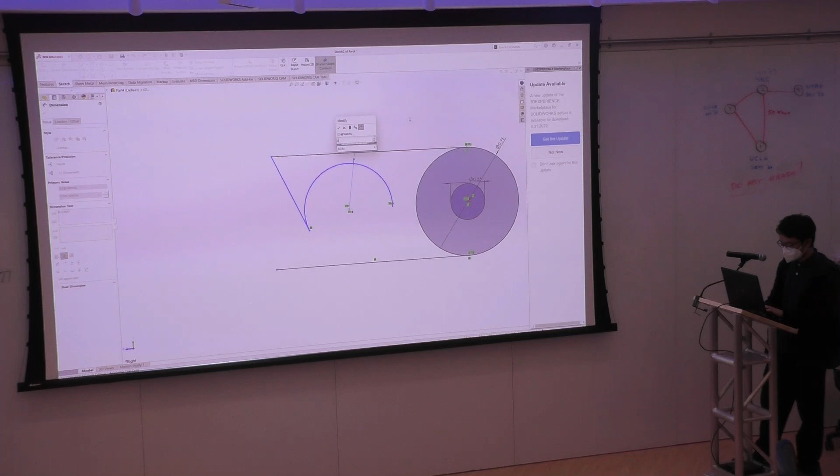And one last thing is the radius of the arc itself. We can see that's radius of 0.25 inches. And so we'll just go ahead and dimension that. 0.25. Okay. Awesome. And then one last thing is to just make this vertical line that connects to this horizontal line. So you can just draw a line down from the end of this arc down here.

And so now we arrive at a situation where I could either dimension this point coincident with this line, or I can use what's called power trim. So power trim is pretty powerful. If you look on the top here, it says trim entities. You click on it. It gives you this kind of like drawing tool. And if you press and click and you hold down, it gives these little gray lines all over the place. So whatever you draw over, it will be cut. So for example, if I wanted to cut this section of the line but not this section, I just do a nice little drawing over it, and then boom, it cuts it. So it just removes everything that it comes into contact with up until the next coincident mate.

Did everyone catch that? No? Okay, I'll do it again. So you have this hanging leftover piece of line that you want to get rid of, right? Because you don't want this line. It's going to make issues when you want to actually try to extrude it. So you want to get rid of it. So there's two ways of doing this. One, you could make the endpoint of this line coincident with the endpoint of this line. So you can go here and click coincident, and it'll move the line to the appropriate place. Or you could use power trim.

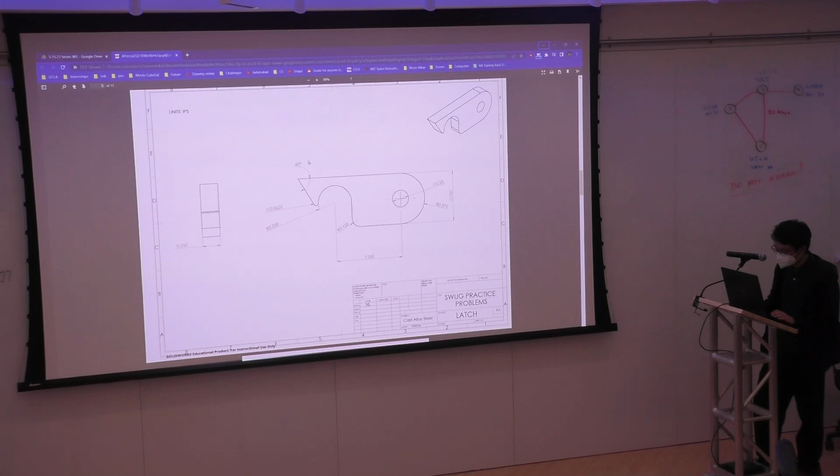So you can see there's a 60-degree angle here. So to do angle dimension, you just select two lines. So you do smart dimension, click this line. You want the interior angle, not the exterior angle. So we'll go ahead and do interior angle of 60. As you can see, everything became black. There's no blue lines anywhere, no blue dots, and on the bottom right, you can't actually see, but it says fully defined. On the left, you can see there's no minus next to sketch 2. So we know it's fully defined.

And just a little bit of cleanup, we can once again use power trim. So if we go up to trim entities, and then we want to remove this half circumference, right? Because we don't necessarily need it. It doesn't appear in the sketch anywhere. There's no half circumference here. So we can just use power trim and then it takes it away.

And then you get this nice shaded geometry to show that it's fully enclosed. And yeah, that's actually basically it for this part. Yeah, sure. So the angle dimension, let me just remove this dimension. So as you can see here, it's blue, right? That means that I can move this point. You can see the angle here is changing.

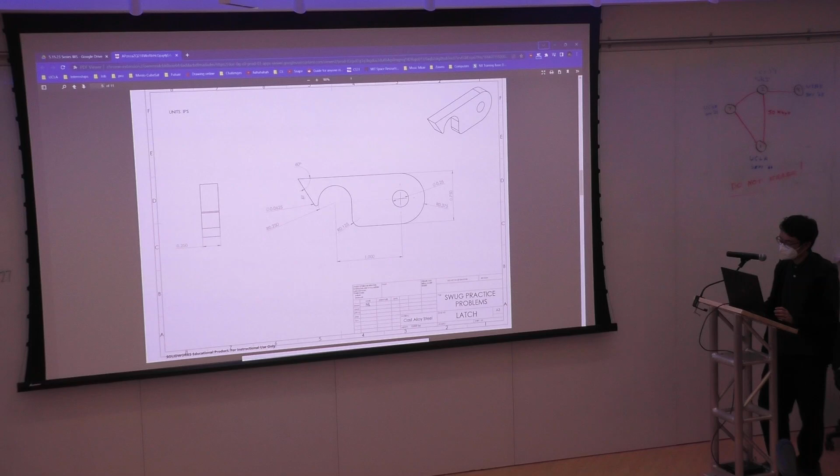So angle dimension, you just click Smart Dimension, and then you click these 2 lines. And then you can either specify the exterior angle or the interior angle. In this case, we want the interior angle because in a drawing it shows the interior angle. Although the 60 degrees text is written outside, it's not exterior because the arrows point inward. And so we want this, and then we click, and then we say 60. And then once again, it's fully defined.

Does everybody have something that looks like this? Power trim? Yeah, sure. Power trim for the circle? The bottom line. Okay, sure, I can go back. So just Control Z as usual to go back. Okay, so with this hanging geometry, right? You go up to Trim Entities on the Command Manager, you click it, and then you just click and drag, and then whatever your cursor intersects, it'll cut away.

It'll cut that away. So of course you don't want to go around like, oh no, I just cut everything. You want to cut what you want to cut, right? So you go down, you want to cut this line, and so you cut it. And you want to do the same thing again for this circle. But let me just go ahead and go back. Actually, oh, lol. Okay, I just need to create all my dimensions again.

Sorry. Okay, I don't think we have time to go through our last and final part, but make sure to keep these sketches for tomorrow's workshop. We'll actually go into creating these as features and maybe go into creating sketches for the third part. If you guys have time before tomorrow, go ahead and look over that third drawing. So it's this one. It's the web block.

This one is significantly harder than the previous ones, but there are not many new features here. There's just a lot of complicated geometry. And so if we have time tomorrow, we will go through this. But yeah, if you have time, look over it. Think about what you might want to make first, make second, how you'd extrude things, which planes to sketch on, and so on and so forth.

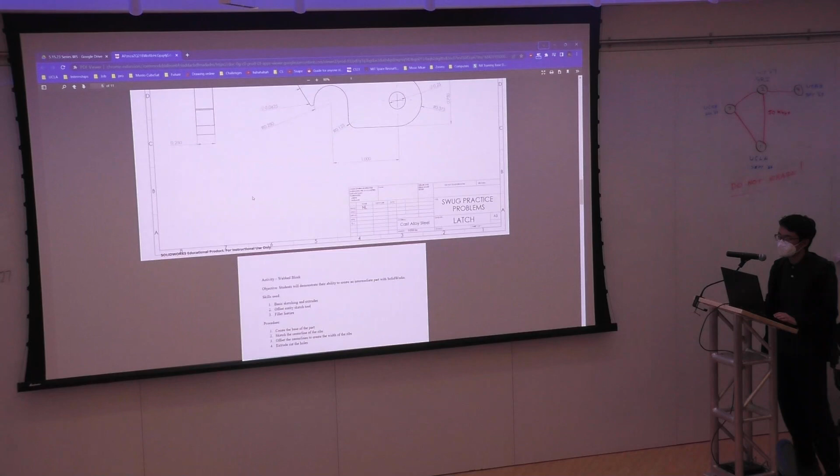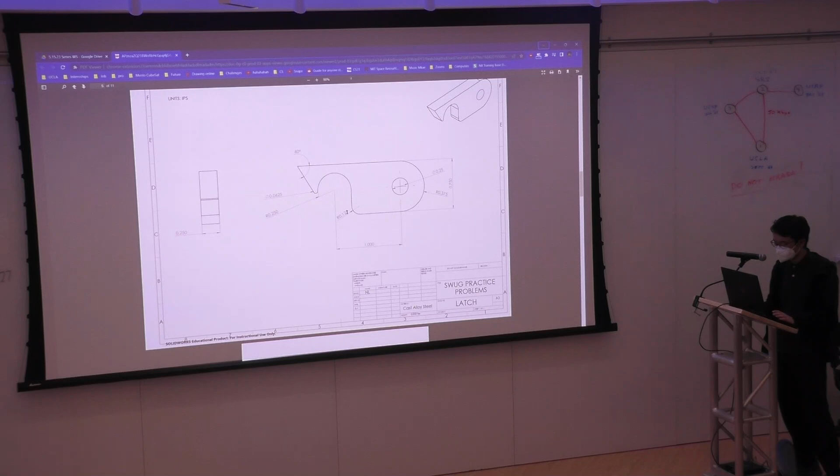Yeah. Oh, shoot. Okay. Yes, I should briefly cover that. Thank you for the reminder. These are actually sketch fillets. Completely forgot about them. This is not fully defined because I went back, but sketch fillets are this little thing on the bottom right of all the different features that you can make. You click on sketch fillet.

It wants 2 lines that are perpendicular to each other or just coincident to one another. So we want this line and this line. And so you can see it creates this radius here. And you can specify how big the radius is under fillet parameters. So in this case, we want a radius of 0.125 inches. So 0.125, press enter, press enter, and then out pops the radial dimension.

And so actually you want to do the same thing for this one as well. This one is actually a diameter, but you could just divide this by 2 to get the radius. So as an example, you click on these 2. We want it to be half, so we get 0.0625. All right, divide by 2, press enter, enter, and then we get that nice little rounded corner. Any questions?

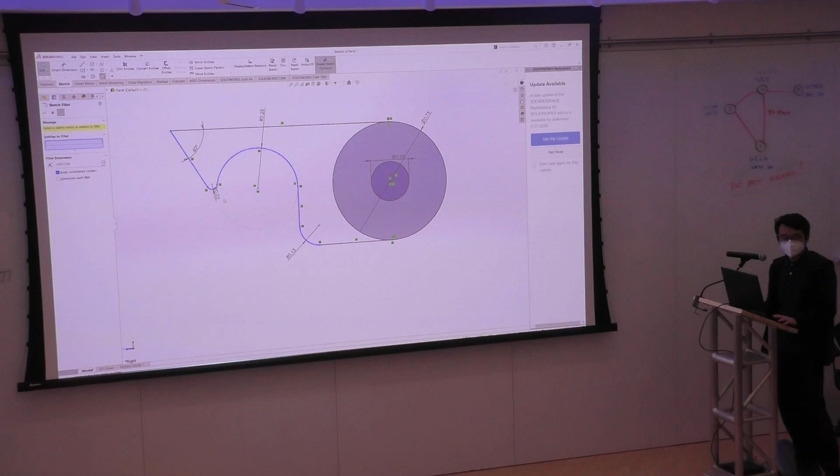Okay, awesome. I think with that we can end here. Sorry we went over time, but hope to see you guys all tomorrow. Tomorrow we'll be covering features and creating features from these sketches.